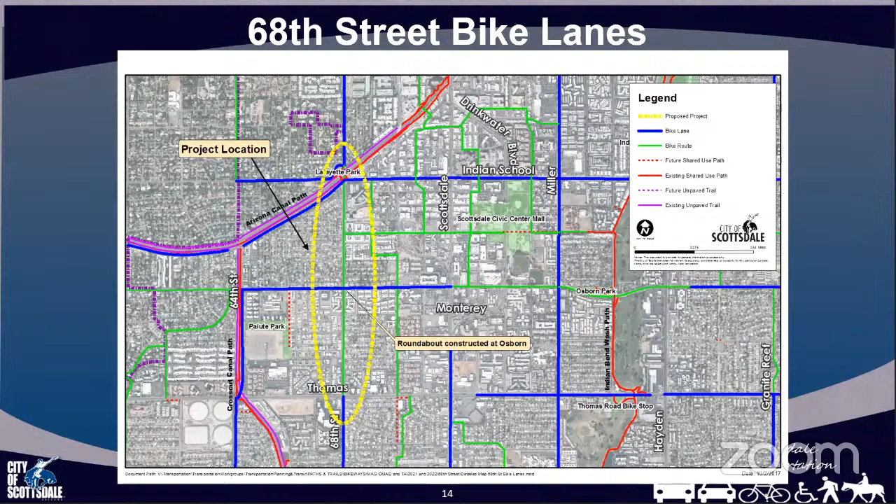Okay, thank you. And I'm sorry if I keep clearing my throat, but it's my allergies, and I know that can be annoying to listen to. So I'll keep this brief, but if anybody wants me to go into more detail, just please let me know or raise your hand. If you go to the next slide, this project is on 68th Street. Originally, I'm showing you our original scope. It was to add bike lanes from Lafayette Boulevard, which is just north of Arizona Canal and Indian School, down to Thomas Road, which would complete bike lanes on this corridor from Tempe all the way up to Paradise Valley. Next slide. Oh, and it was also originally going to include a roundabout at Osborn, which is one of the major things that I'm asking for a scope change on.

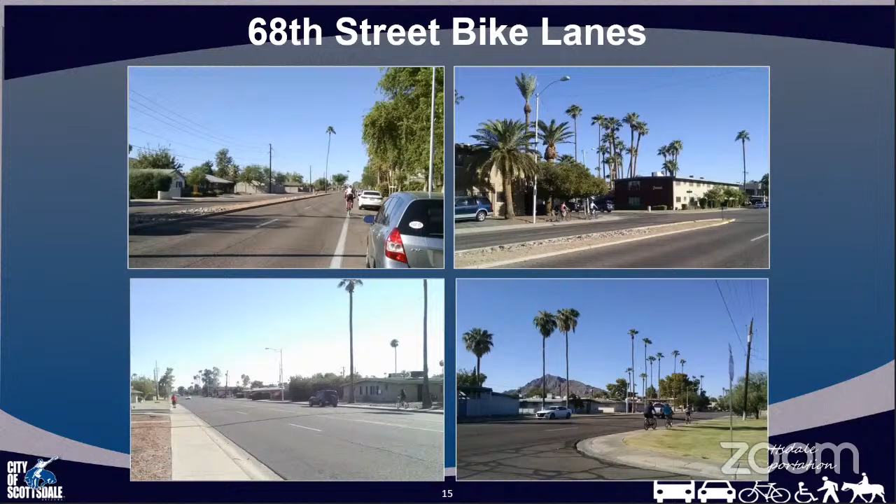Next slide, please. So the request that we're making is to remove the roundabout at 68th Street and Osborn Road from the scope and add signal adjustments, because this project is still intending to remove that second travel lane in both directions so that we can add bike lanes, hopefully keep the parking, and then add some turn lanes throughout the segment. We would need to make signal adjustments related to that instead of removing the signal at Osborn to add that roundabout. And then we would like to add an RRFB at 68th Street and 2nd Street.

That's been requested by residents. That's a quarter mile in either direction from a signalized crossing. And 2nd Street itself is a pretty good low stress bike route throughout the city, or at least from Indian Bend Wash over to this area. We intend to keep improving parts of 2nd Street in segments, but there's a lot of neighbors that already cross in this area that asked us to consider that with this project.

And we would also like to reduce the length of the project by 500 feet at the north end. So that segment from Lafayette Boulevard to Indian School was already completed with new bike lanes and sidewalks when the 68th Street bridge over the Arizona Canal on an emergency basis needed to be demolished and rebuilt. So we got the cross section we needed there. That was completed in 2019, so we don't need to make any improvements up to that north end anymore.

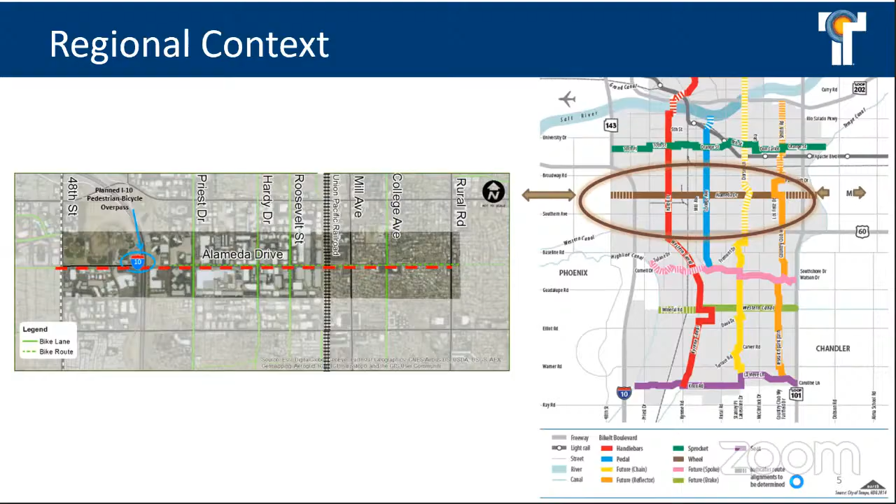These red lines represent bike lanes running north-south along the project corridor. So we have numerous north-south connections, but this east-west connection is badly needed for the city of Tempe. It's actually well traveled by the bicycle community where they can get past these gaps.

We have a huge gap, one being the Union Pacific Railroad, that black dash line on the eastern part of this project, but also the I-10, which is going to be addressed by the I-10 pedestrian bridge project. So the local significance for us is this east-west connectivity that's sorely needed in Tempe.

This connects employment destinations in this industrial area, as well as recreational and entertainment venues west of the I-10, the Tempe Diablo Stadium area, and recreational fields further west, while also connecting neighborhoods east of the Union Pacific Railroad along this lower volume, lower speed collector between Broadway and Southern.

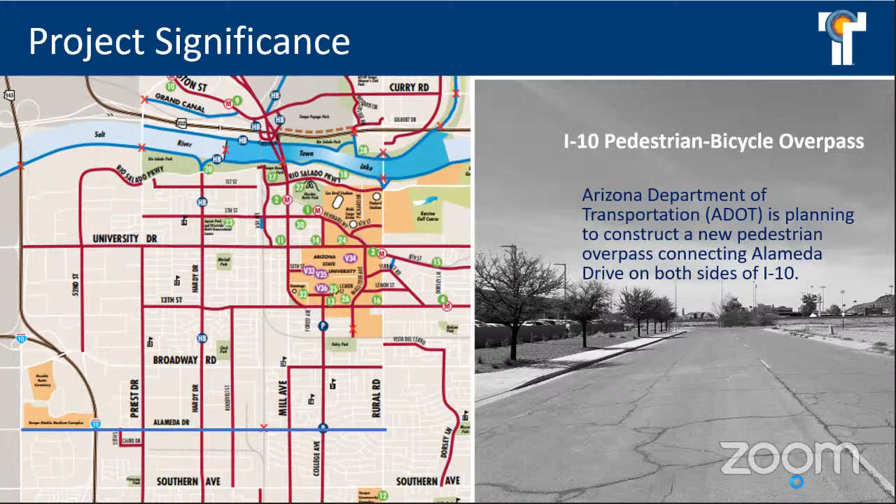In addition, the city also committed separate funding beyond the I-10 identified improvements for the pedestrian bridge. The city also programmed within its CIP to have public art along that bridge. So this project will connect not only to the I-10 funded bridge itself, but also to that public art we'll be placing with the I-10 improvement.

Some of the specific improvements we're talking about address the lack of bicycle infrastructure. The corridor changes as far as available right-of-way and some constraints, but this is going to be a holistic streetscape project. We don't only want to address bicycle infrastructure, but also the pedestrian level, as well as traffic calming.

What's being proposed with this final design is the addition of medians, curb extensions or landscape chicanes along the project corridor, as well as a buffer, depending on what the available right-of-way is along the corridor, as well as the land use.

What we're proposing along the industrial area is going to be different than what we're proposing within the residential area. We're going to be improving the bicycle infrastructure as well as the necessary ADA improvements, which include directional ramps and sidewalks along the corridor.

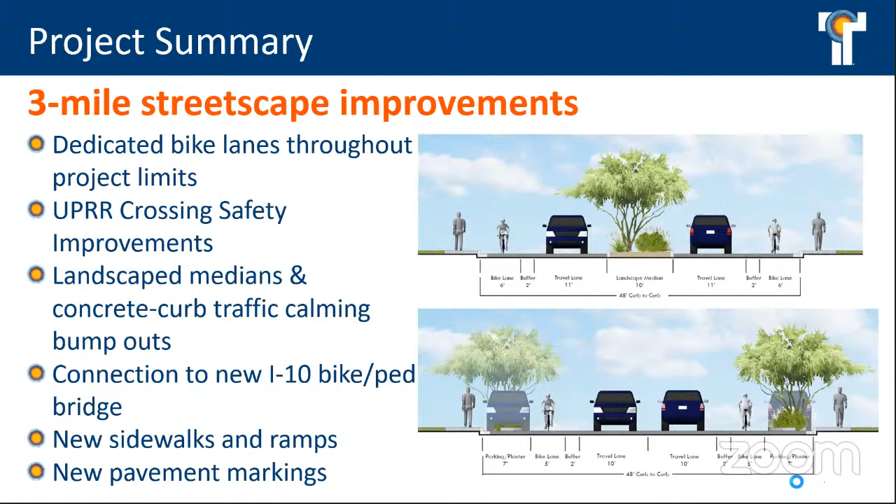This project was originally awarded just over 1.5 million in transportation alternatives funding, and that was originally programmed for the construction work year of 2019.

We started our final design in January 2018, did our public outreach, and requested our first deferral in April of 2019. The main reason for that first deferral was due to a water line break along this project corridor.

Although unfortunate that we had that water line break, it also gave us an opportunity to relocate that water line. It gave us more opportunities as far as what interventions we're able to put into the streets, including the opportunity for landscape medians, which otherwise weren't possible.

So although it was unfortunate that we had this water line break, it gave us the opportunity to have some landscape medians and other interventions we otherwise wouldn't have had. But because this was a water line break, we did not have this programmed in Tempe's CIP, so we needed time to program this separate water line project to relocate that utility. At this point we're at 90% final design, completed this past February.

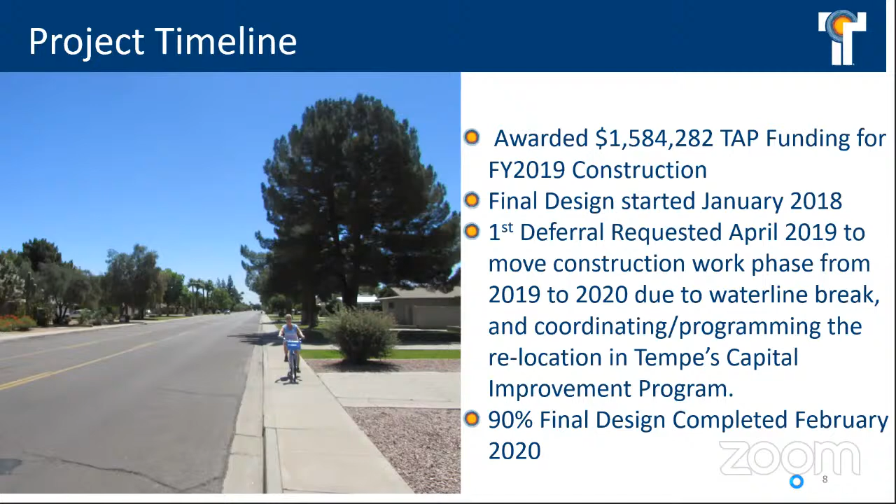This current deferral request, along with just the time needed to get this water line identified in our CIP—it wasn't identified as a future improvement as far as water utilities—so we didn't have that yet programmed. In order to have the time to do that, we needed that first deferral, which goes into the second deferral.

Along with that, we've also experienced, as we have in the past, some coordination issues with the Union Pacific Railroad, in order to get the diagnostic actually held. So what we're coming today for is the second deferral request.

And that's, again, to give us the time to be able to program this water line replacement and relocation, as well as to give us the time. We just held our diagnostic for the Union Pacific. So now we're beginning the final design with Union Pacific's consultant to do this portion of the Alameda Drive project, just the Union Pacific crossing.

So because of those two reasons, we're requesting a second deferral, and that's to move it from what would be work year 2020 to work year 2021. Next slide, please.

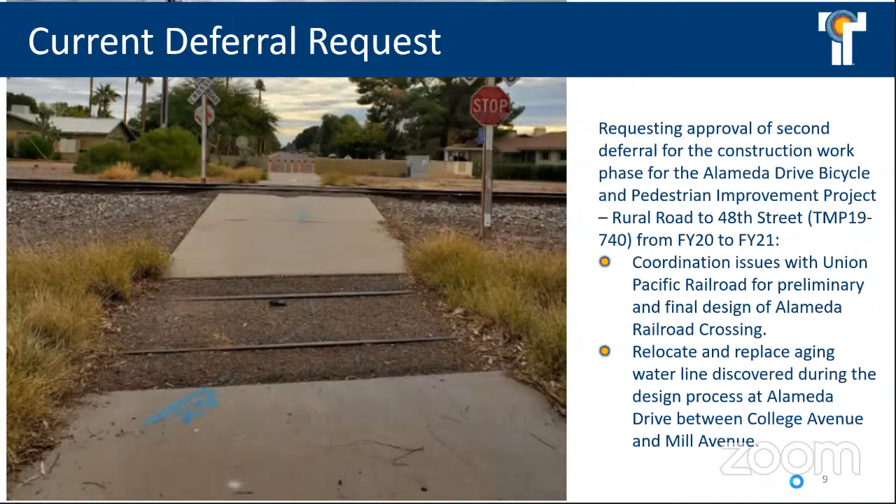As far as the city, we are, of course, committed to the project. We as in water utilities, not transportation, are committed to this water relocation project, and we have that programmed into our future CIP for this project. In addition, we requested an additional $200,000 just for the crossing alone for the Alameda Drive area. So this was an additional $200,000 along with the local match funding and final design funding that we already had programmed through our CIP. And then, of course, project management staff will be involved and continue to be involved until the completion of the project.

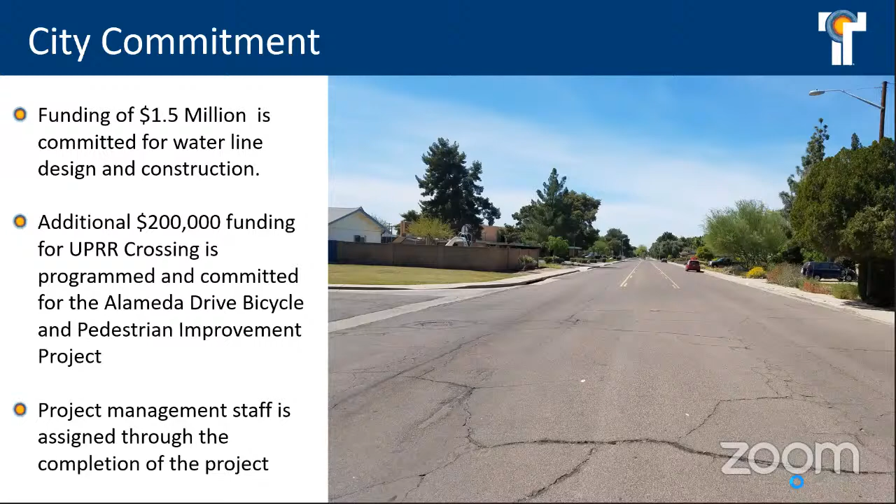Next slide, please. So with that, and with those delays of moving this deferral from work year 2020 to 2021, our new proposed schedule is that we will plan to finish up design here in March of 2021, and we will start construction in May of 2021 with anticipated construction timeline of about a year, and that will also coincide with the water line construction. So we didn't want to go out twice,

obviously, to do the water line construction and the streetscape project. So we are attempting to align it with the newly programmed water line reconstruction project. So we're looking at May 2021 for the new project schedule as far as the start of construction. And with that, that concludes my presentation. Thank you for the opportunity to present our second deferral request, and definitely take any questions that members of the Active Transportation Committee have at this time, or direct them to Robert.

Mr. Chairman, this is Jason with the City of Chandler. I had a question. Chase, do you guys have an agreement in place with UPRR? I'm asking, through something similar a few years ago. I had to request a second deferral on our Union Pacific crossing at the Western Canal. And it was tedious trying to work with UPRR, and we finally got through it, but getting that agreement in place really took a lot longer than we thought. So for our second deferral, we actually deferred it 2 years instead of just one. So I'm just wondering if you guys have the agreement in place. If not, do you feel confident that will be coming soon? Because just a 1 year deferral could leave you in a very tight timeline come next year.

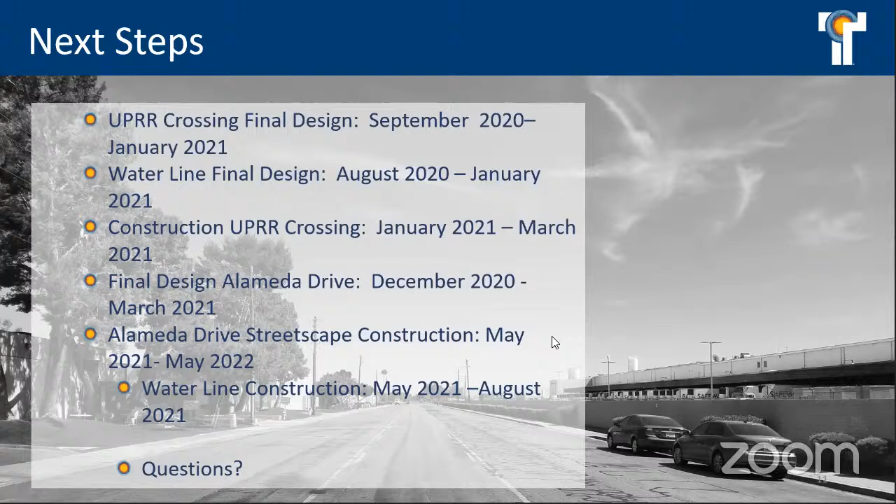Okay, thank you, Jason, so the motion passes. Congratulations to Tempe. All right, let's go ahead and move on to the second Scottsdale request, a project scope modification request, City of Scottsdale, Thomas Road, 56th Street to 73rd Street.

Thank you. So we're coming in for a second project modification request, and these actually overlap, but when we applied, we were amazed to be selected for both. You just never know. Next slide please. Actually, this one we're keeping in the program years that they're in, but they're both under design now. This project is funded in 2022 for construction, and the project area is on Thomas Road from our border with Phoenix at 56th Street over to 73rd Street, which is just past Scottsdale Road.

We previously had a project a few years back where we built bike lanes from 73rd Street over to Indian Bend Wash, and we just finished Hayden and Thomas area. So this is the remaining gap in bike lanes on Thomas through the whole city.

This project intended to remove, it's got two westbound travel lanes and 3 eastbound travel lanes. So this project has always been looked at to remove that third eastbound travel lane. It's already 2 and 2 the rest of the way through Scottsdale. And then we had planned to put a roundabout at Thomas and 68th Street when we applied.

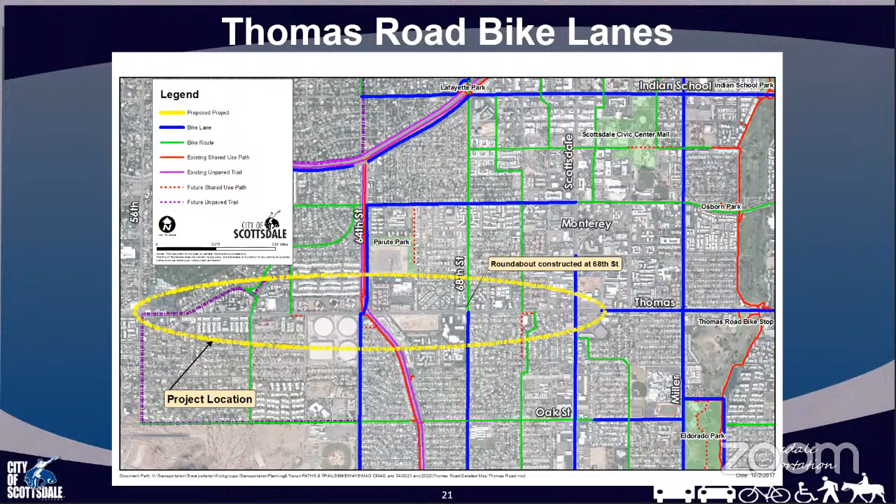Next slide, please. So this shows the area. Again, this is an older area of the city with 5-foot sidewalks. It really doesn't give a lot of space to people, but there are people that ride along the sidewalks through here. We've got from about 64th Street over to Scottsdale Road, a lot of commercial properties. And then when you head farther east from this area, there's residential, a lot of multifamily residential as well.

So those 2 top photos are looking between Scottsdale Road and 70th Street. And then the lower left is at 68th Street. I put an inset to show how many conflicts along the sidewalk at the southeast corner occur right now for anybody that's riding or walking or has a disability that's using a mobility device trying to get through that area with all that infrastructure in the way.

And then the lower right corner, that's really close to Rage Bicycles, where there's this lower parking lot below the sidewalk and a guardrail or a barrier and then poles in the way. So it creates a lot of pinch points and issues for people using the sidewalks. And then the project itself would update all the curb ramps anywhere where we need them.

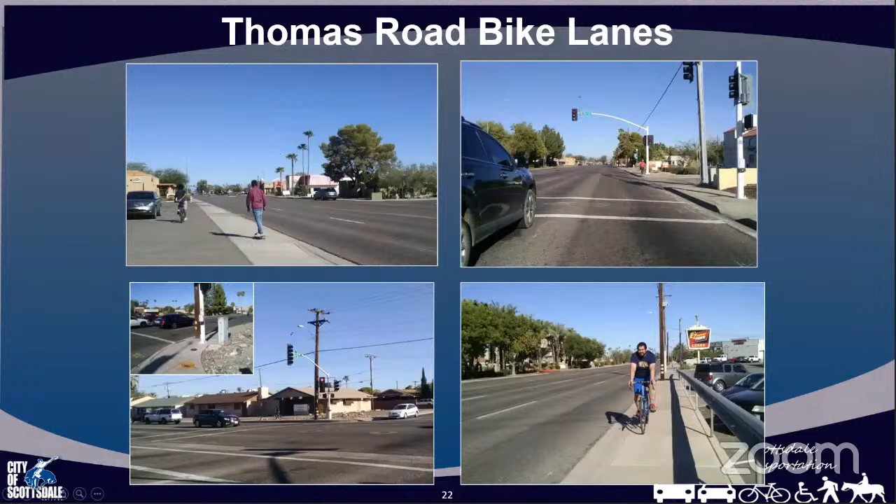Let's see, next slide, please. So once we looked at the feasibility of how a roundabout would work, because we do have a policy to always consider roundabouts before we look at other improvements, once we looked at the feasibility, we realized it wasn't going to work without having to acquire 1 or 2 commercial properties and possibly a commercial building that I'll show you in the next slide.

But instead, we would add some minor intersection improvements. We're going to deal with the power poles and light poles and different things. And we're also going to try to make just bigger, maybe more of a bigger landing at each corner for people crossing the streets, and then add signal upgrades to shift the signals over where the new travel lanes will be.

We would do that throughout the project at the existing signalized intersections, since if we're going to shift everything to the south, striping wise, to add our new bike lanes and take out that third eastbound lane, we would need everything to line up where it is. And we're also making sure that we have good left turn lanes and right turn lanes at the intersections so that we still keep traffic flowing the way it needs to while still providing space for people riding bikes.

And then we would also add improvements. We debated adding this to the 68th Street project, but it makes better sense with Thomas Road so that it happens with the intersection. But we wanted to add improvements going south from here at 68th and Thomas and extend them down to East Virginia Avenue. That's about a 1/4 mile. There's already a little bit of bike lane striping in that area, but this would remove the excess travel lanes that are on 68th Street and help everything line up with the intersection improvements that are going to happen just south of the intersection.

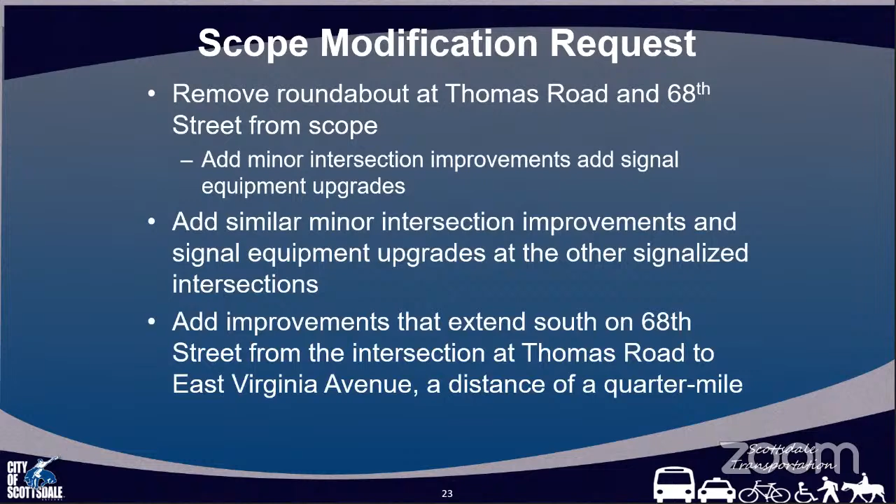And we do believe that creating the cross section that we want with both of these projects, how they intersect, and adding bike lanes in every direction, but also adding the turn lanes that are needed, from curb to curb, we feel like we can have a good project that's going to work for all modes. And there's also a lot of transit activity east-west on Thomas Road. So this is why we feel like this new scope would be the best to make this a complete street.

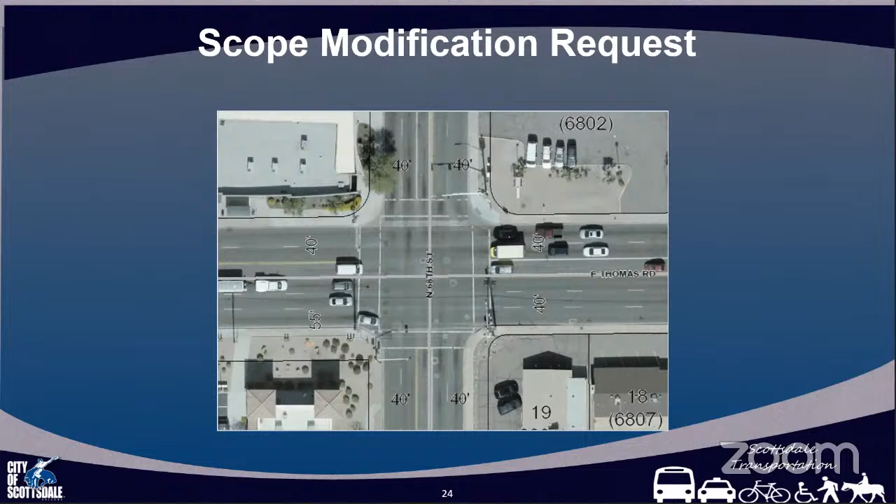The next slide just has our cost comparisons. We're actually saving, I think, quite a bit on this one by taking that roundabout out of there. So originally, the total was over $4.8 million for that, and now we're bringing it down to 3.3, and it's reducing the local and federal split quite a bit, I think. So if anyone has questions.

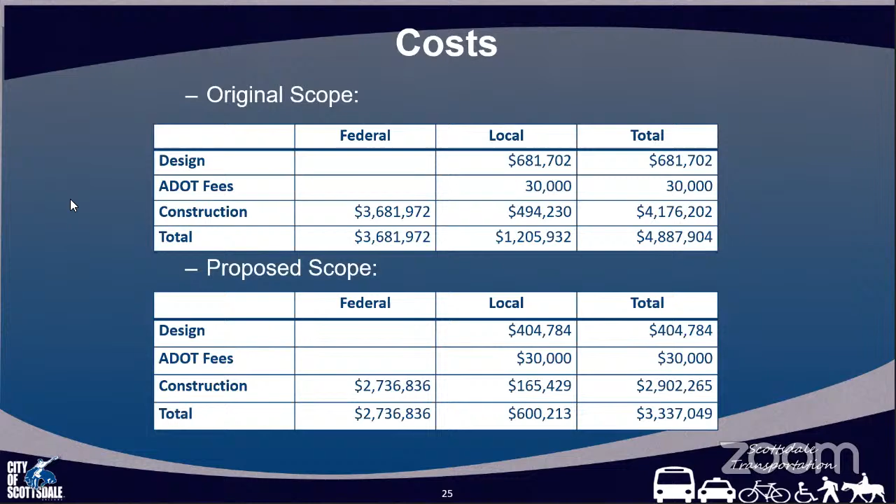Roll call vote: Grant, yes. Bob Dean, yes. Jason Bochin, yes. Stacy, yes. Marielle, yes. Nathan, yes. Jason Crampton, yes. Stephen Esther, yes. Sharon Basic, yes in the chat. Larry Kirch, yes. Ashley, yes. Jose, yes. Jessica, yes. Christine, yes. Garrett, yes. Nathan, yes. Robert Weisner, yes. Ryan Wozniak, yes.